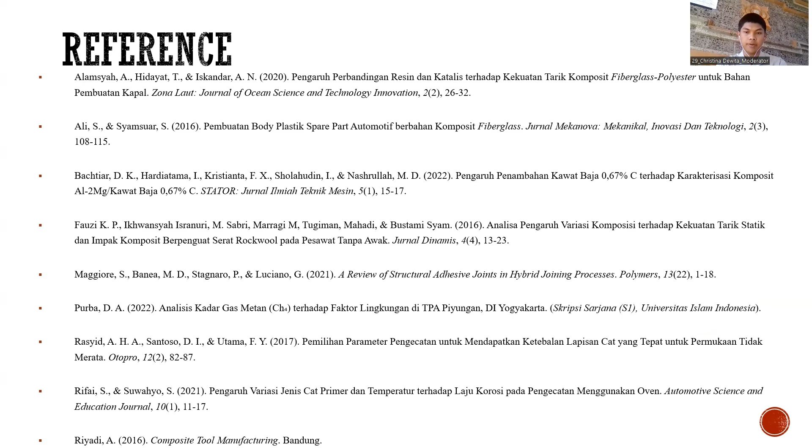There are a few references that I took to make this presentation: a few journals, a final report, and a book.

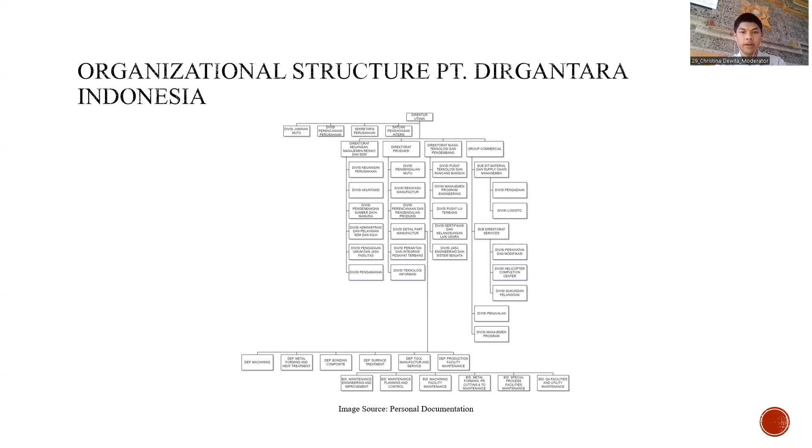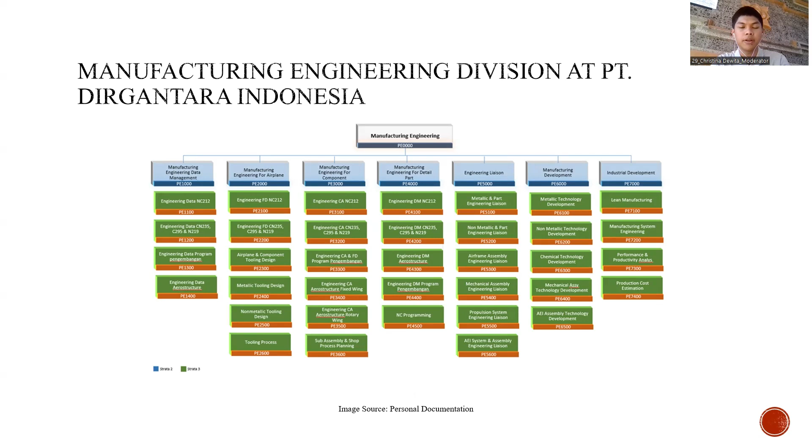This is the organizational structure at PT Dirgantara Indonesia. There are a few divisions, and I was placed in Divisi Rekayasa Manufaktur, the Manufacturing Engineering Division. There are 7 departments within it, and I was placed in the Manufacturing Engineering for Airplane department, which is PE 2000.

This is my work experience in the PE 2000 department at PT Dirgantara Indonesia. During the on-job training, I had the opportunity to focus on activities carried out in the PE 2000 department of the Production Directorate. The PE 2000 department has tasks focused first on pre-planning, which explains how teams work and their responsibilities in designing manufacturing strategies and concepts. Second is MBOM evaluation, needed when design changes and manufacturing changes occur due to efficiency problems or difficulties in realizing the design.

Third is the master sheet process, which explains the duties and responsibilities of related functions, as well as preparing and planning work step instructions in the production area and provision of material services in accordance with engineering design data. Final is tooling design and tooling process, needed to create and plan special tools to support the aircraft production process.

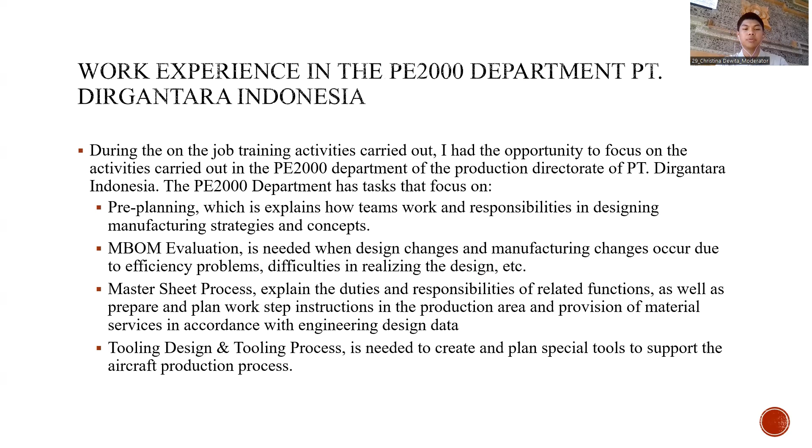There are a few main subjects in this on-the-job training report. First is the working steps for making a cargo door on the N219 aircraft. Then there are the working steps to install the cargo door on the N219 aircraft. And finally, the detailed part manufacture of the N219 aircraft cargo door.

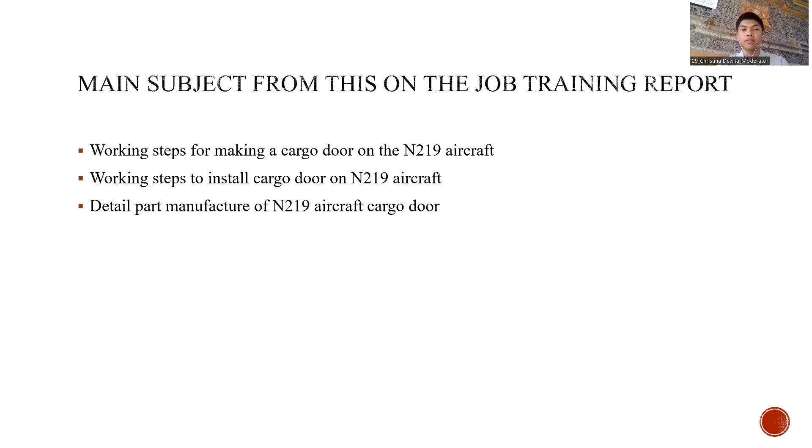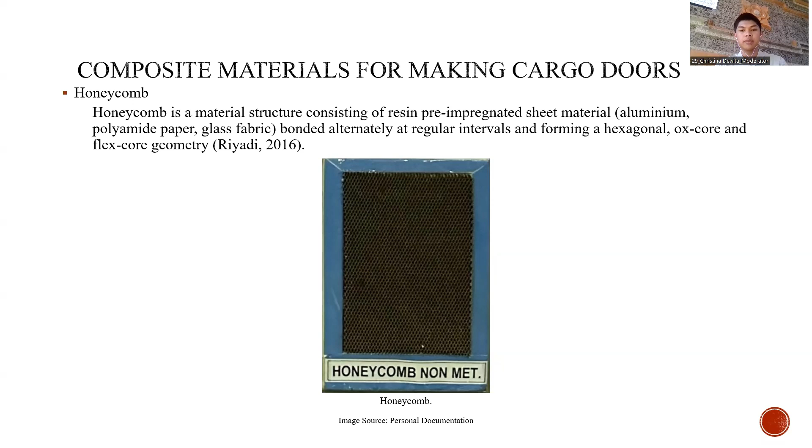First I will talk about the composite materials for making cargo doors. First is honeycomb. Honeycomb is a material structure consisting of resin pre-impregnated sheet materials, for example aluminum, polyamide paper, or glass fabric, bonded alternately at regular intervals to form a hexagonal ox-core and flex-core geometry. This is an image that I personally took on site showing the honeycomb.

Second is fiberglass. Fiberglass is an alloy or mixture of several chemicals consisting of liquid resin, catalyst, calcium carbonate, matte, cobalt blue, and wax, which react and harden within a certain time.

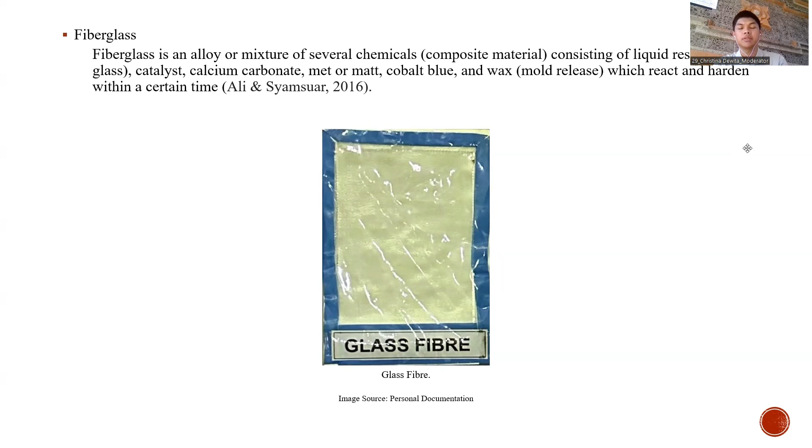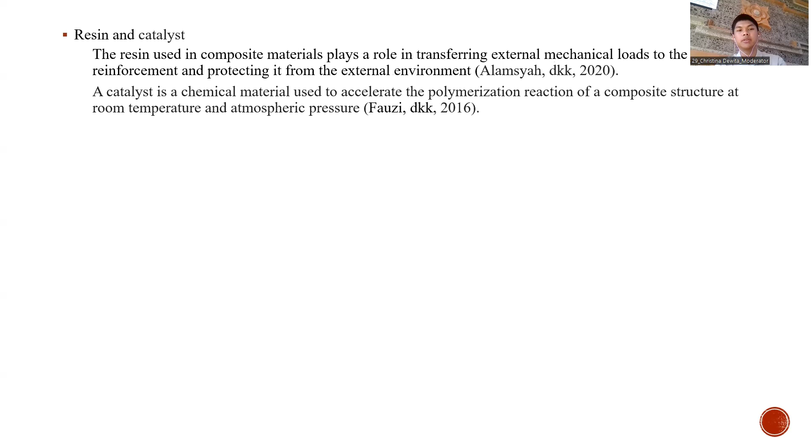Next is resin and catalyst. The resin used in composite materials plays a role in transferring external mechanical load to the reinforcement and protecting it from the external environment. A catalyst is a chemical material used to accelerate the polymerization reaction of a composite structure at room temperature and atmospheric pressure.

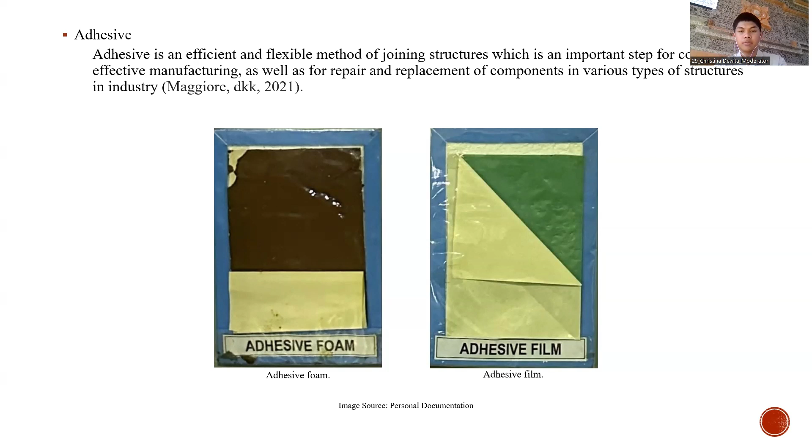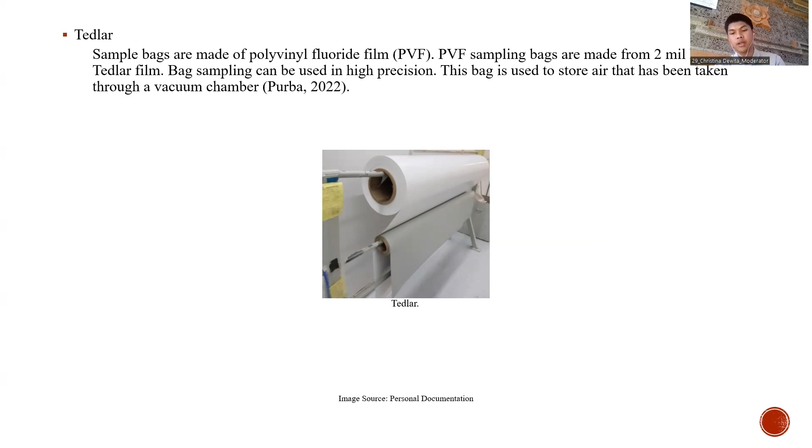Then there is filler. To get a good painting surface, you must start with good product surface preparation, and one of the surface preparation processes is filler application. Then there is epoxy primer. The corrosion control process is an effort aimed at extending the life of the metal, and one way to control corrosion is by coating with primer paint.

Alumesh is one type of metal matrix composite, or MMC. A metal matrix composite is a composite material consisting of at least two constituent parts, one of which is metal. Other materials can be metals or different materials, such as ceramics or other organic compounds. MMC is made by incorporating reinforcing materials into a metal matrix.

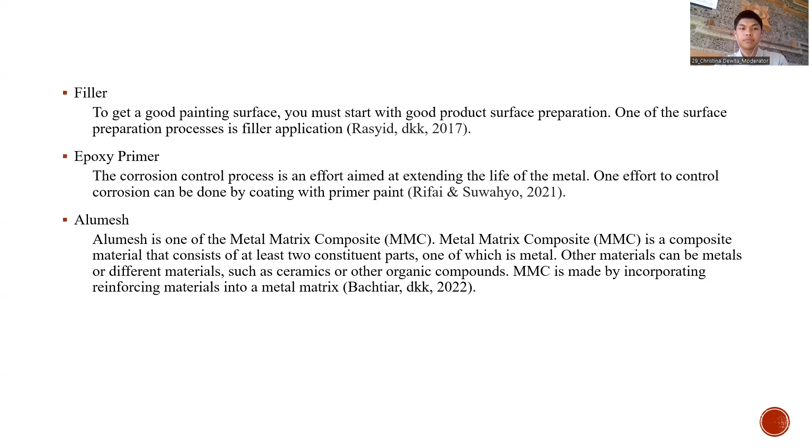Next, I want to talk about the cargo door manufacturing process. The following is the process of making a cargo door on the N219 aircraft at PT Dirgantara, Indonesia.

First, there is operation number 0001, remark, that tells a notification to the production division regarding what can and cannot be done. Then there is operation number 0010, issuer inspection, that checks the identification and condition of components and raw materials according to the parts list.

Then there is operation number 0020, clean tool composite, that cleans the surface of the tool with a clean cloth that has been given a release agent, and then dries the tool. Then operation number 0030 is composite inspection, which checks the homogeneity of the release agent applied to the surface of the tool, and checks the cleanliness of the tool.

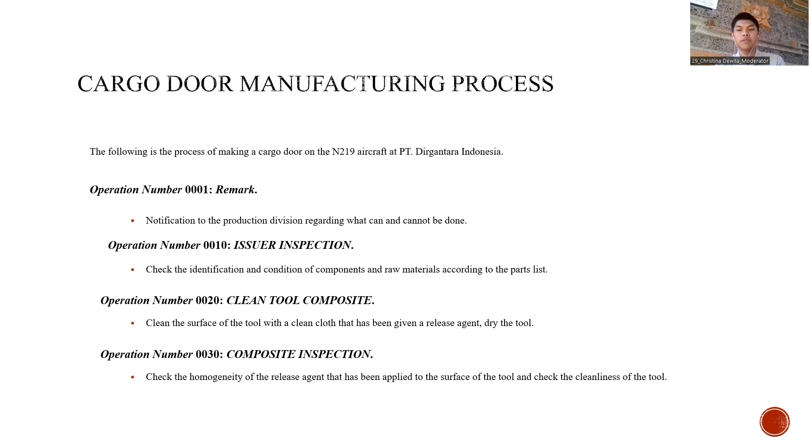And operation number 0040 is layup composite. In this process, we use a bonding assembly jig, or baji tool, for making composite part assemblies consisting of several different types of material.

The ply core locating template tool is used for making composite parts, functioning to place the core and ply pre-preg for the part-making operations. The tool is placed on top of the baji tool, and then we use the core tool template to cut the core before the bonding operation is carried out. This includes cutting the chamfer core according to the part engineering drawing.

These are the following steps in operation number 0040. Cut the glass prepreg material, then cut the prepreg materials for the specimen sandwich panel, and then take the core for the sandwich panel specimen.

Then cut Tedlar, alumesh, and adhesive film, then clean the core using a solvent-filled cleaning spray. Then lay up one layer of adhesive film on the surface of the tool, and then lay up one layer of alumesh on the surface of the tool, and then lay up glass epoxy in 4 layers in the direction according to the technical drawing.

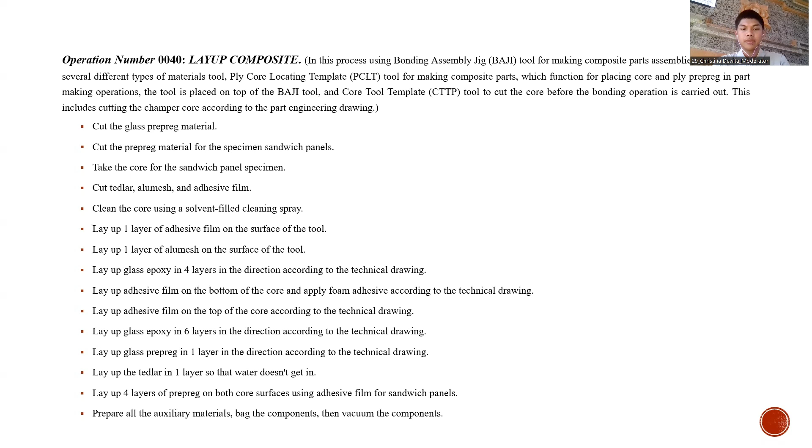And then lay up 4 layers of pre-preg on both core surfaces using adhesive film for sandwich panels. Prepare all the auxiliary materials, bag the components, then vacuum the components.

This is the image of the bonding assembly jig, shown in orange in the picture, and there is the ply core locating template shown in pink color in the picture, and on the right side there is the core trim template. All of this image I took personally on site.

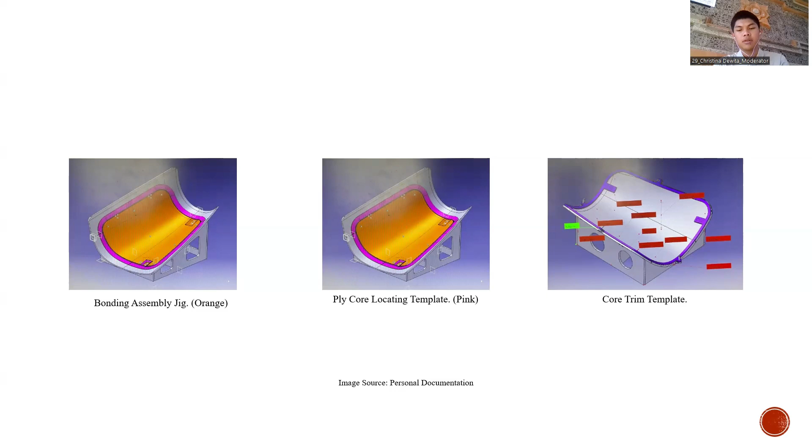Then there is operation number 0050, composite inspection, which makes sure all lay up dry operations have been completed, and makes sure all bagging operations have been completed. Then we verify each composite bonding inspection card.

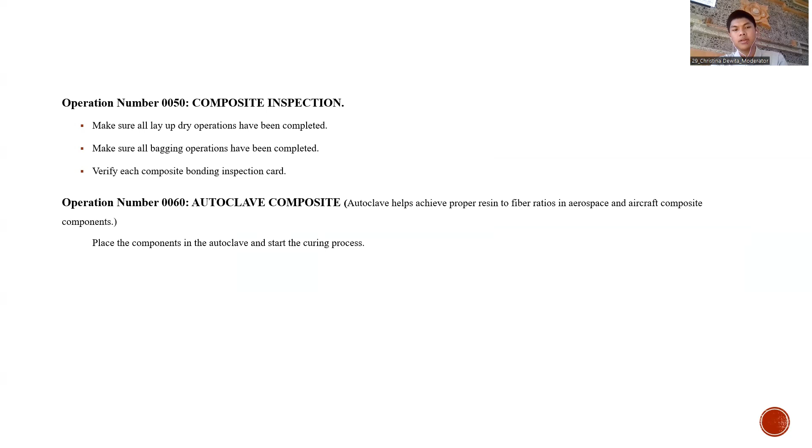Then on operation 0070, debagging composite, we remove all auxiliary materials after the curing operation is complete, then remove the component carefully, and then move on to operation number 0080.

Composite inspection, where we make sure the curing operation is complete. Operation number 0090 is ultrasonic inspection, where we perform an ultrasonic check to determine if the component meets the desired specification.

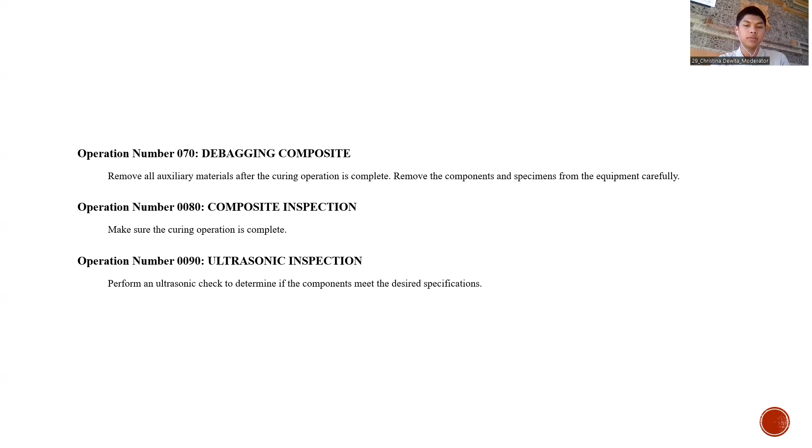In operation number 0100, composite fitting, we use a hand router and drilling tool for cutting and punching parts after the end of autoclave operations. First, lay out and cut the specimen parts completely for the sandwich panel test, considering the dimensions.

Then cut the edge part of the component and drill 4 holes according to the technical drawing. Then prepare and mix the epoxy resin. Then apply 1 layer to all cut edges according to the technical drawing. Then dry the component and prepare the identification plate.

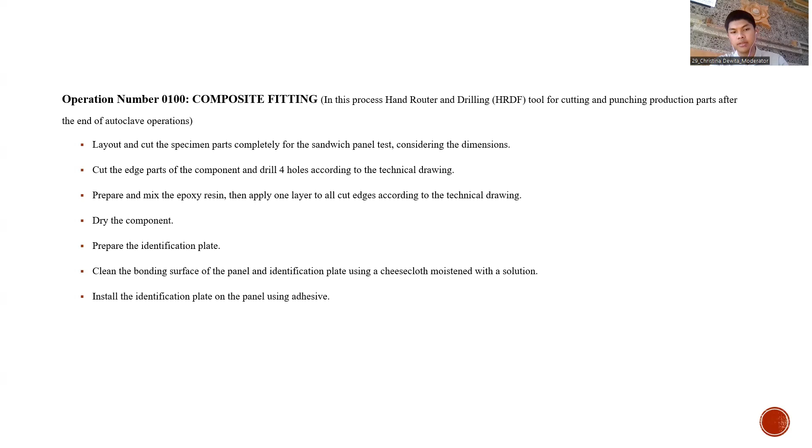Clean the bonding surface of the panel and identification plate using cheesecloth moistened with a solution, and then install the identification plate on the panel using adhesive. This is the image of the hand router and drilling fixtures that I personally took when on site.

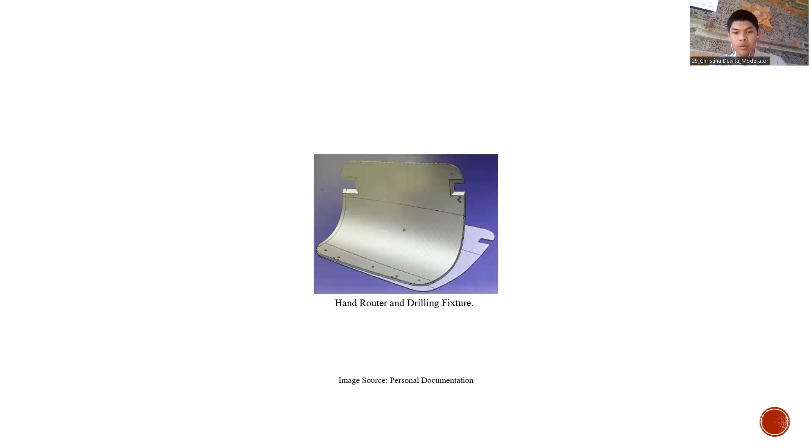Then in operation number 0110, composite inspection, we ensure that all steps have been performed according to the technical drawing, and then we check the dimension of the panel specimen, then send it to the bonding laboratory.

Then visually inspect all the cut edges and check the identification and condition of the resin materials and check the resin mixture. Then verify all composite bonding inspection cards. Thus, we accept the component if the specimen results pass, and reject the component if the specimen results fail.

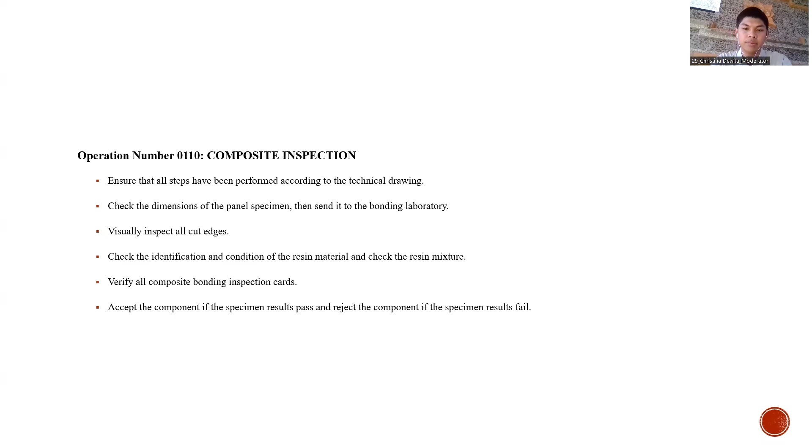Operation number 0120 is filler. In this operation number, we prepare and apply pinhole filler to the outer surface of the component. Then, using a grinder, smooth and neaten the excess filler. Operation number 0130, interior decoration inspection. We check the identification and condition, ensure they are in a good condition, and inspect the component visually.

Operation number 0140, painting BOCOM. Apply epoxy primer to the component using a spray gun. And operation number 0150 is interior decoration inspection, to check and record data on the form. And then operation number 0160, marking. We mark part number, JID NO, date, and weight with R on the component. And in operation number 0170, final inspection, we check and verify completion of all operations.

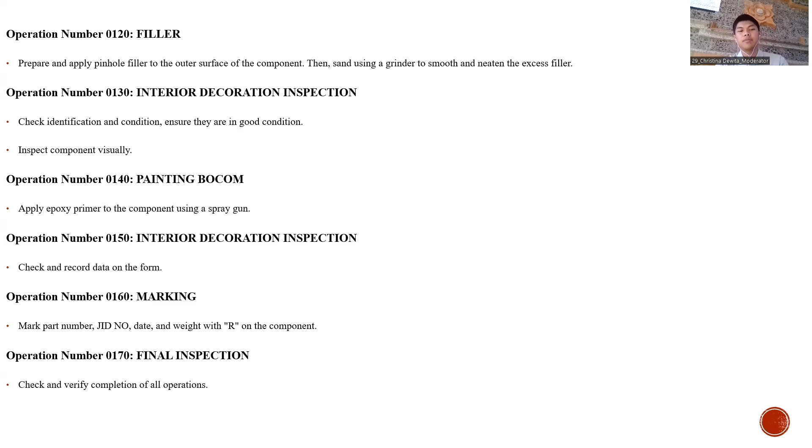In cargo door installation to the N219 aircraft at PT Dirgantara Indonesia, first there's operation number 0005, the remark, which is to notify the production division regarding what can and cannot be done, and then check the identification and condition of components.

And in operation number 0020, fuselage integration N219, the installation of the cargo door and forward cargo compartment is carried out in the bonding and composite shop, using a drilling tool on the cargo door and forward cargo compartment, making it easier to install hinges, and using positioning rubber seals makes it easier for mechanics to position the rubber seal, and is done in the bonding and composite shop.

In this operation number, we install bushings in the latch bolt holes provided on the cargo door to prevent loosening of the installed bolt during the bolt installation process. Tighten bolts according to the specified standards and then install the rubber seal around the edge of the cargo door using adhesive to isolate the forward cargo compartment from outside conditions, and then install the inserts in the hinge bolt holes provided on the cargo door to prevent loosening of the installed bolts during the bolt installation process.

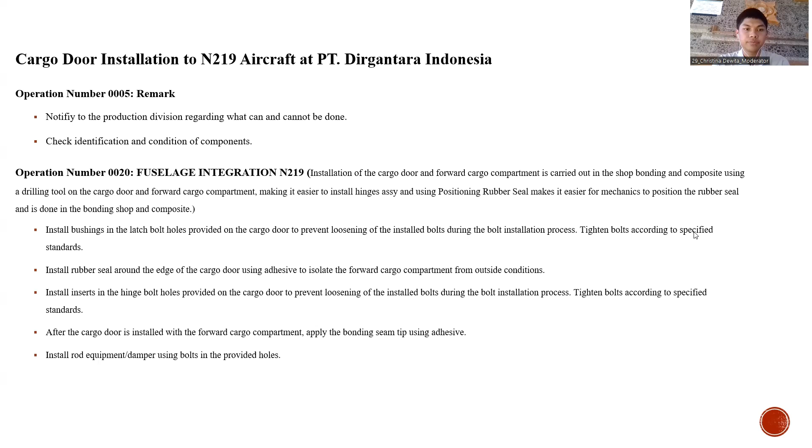And operation number 0030 is structure inspection, where we conduct a structural inspection before proceeding to the sealant process in the sealant shop to ensure proper and specification-compliant sealant application. Operation number 0040 is sealant shop. Apply sealant to components according to the technical drawing. And then in operation number 0050, sealant inspection, we ensure that the applied sealant is controlled and meets requirements.

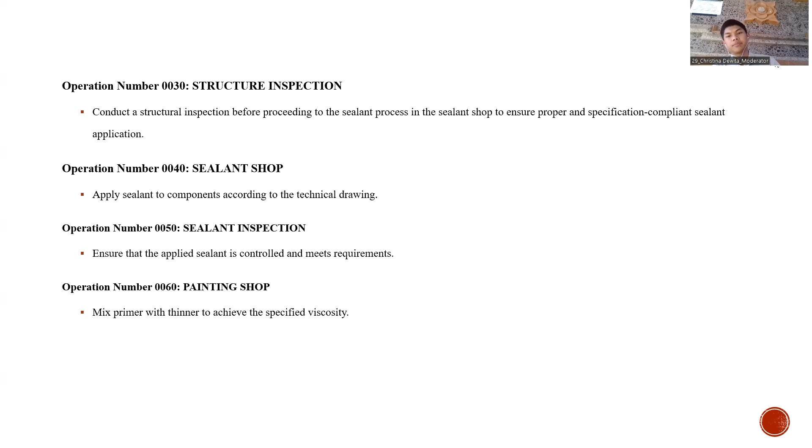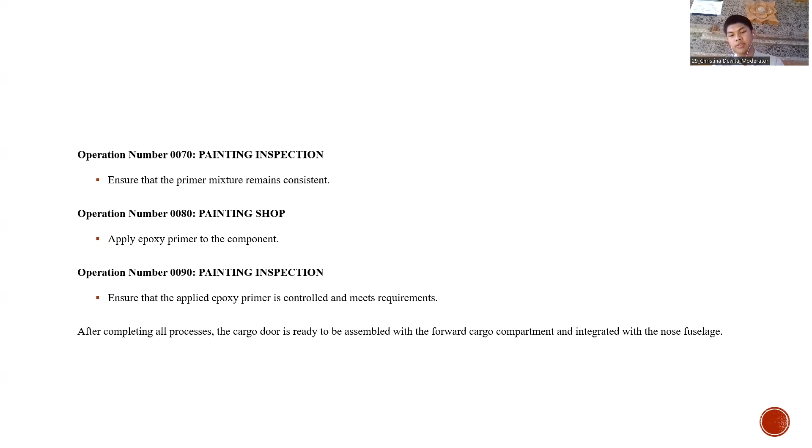And operation number 0060 is painting shop. We mix primer with thinner to achieve the specified viscosity. Operation number 0070 is painting inspection. Ensure that the primer mixture remains consistent. Operation number 0080 is painting shop. We apply epoxy primer to the component. And operation number 0090 is painting inspection, to ensure that the applied epoxy primer is controlled and meets requirements. After completing all processes, the cargo door is ready to be assembled with the forward cargo compartment and integrated with the nose fuselage.

So the conclusion, based on the data gathered from the field survey conducted during the internship work at PT Dirgantara Indonesia, the following conclusions can be drawn. The manufacturing process of cargo door components for the N219 aircraft entails a series of intricate and well-structured steps. This process utilizes high-quality components and materials to ensure the safety and reliability of the cargo door. The production and engineering teams collaborate closely to guarantee that each stage of the process is carried out efficiently and adheres to safety standards.

Second, the fabrication process of cargo doors encompasses a series of intricate and structured steps, beginning with initial design conceptualization, followed by the meticulous selection of high-quality materials, and culminating in the meticulous formation of the door structure to guarantee both quality and safety. The production and engineering teams collaborate seamlessly to ensure that each stage of the process adheres to aviation safety standards and is executed with utmost efficiency.